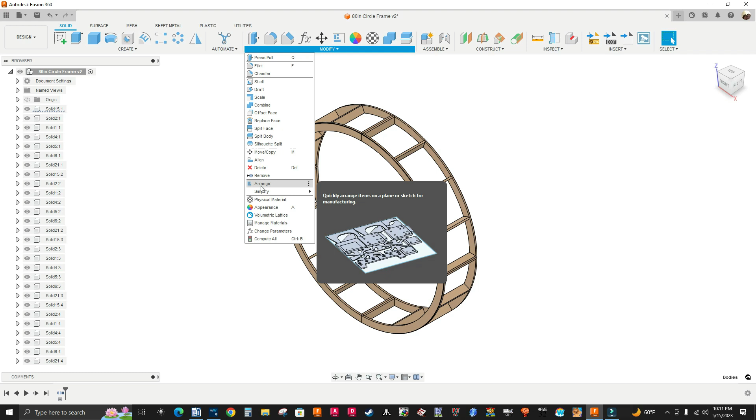With the nesting fabrication extension, it does everything for you automatically. If I go to Extensions, I'll show you which one it is—you see it's Nesting and Fabrication, and mine is active. It's going to be active for 14 days, so this is great.

So if you do a lot of nesting, have a nested base CNC machine, Homag or Weeke, and do a lot of nesting, and if you have the money to afford this extension, which is $1,600 a year—sometimes they have promotions so you might get it cheaper, maybe 1,500 or 1,400—you could also pay monthly, which is $200 a month. That's a lot of money.

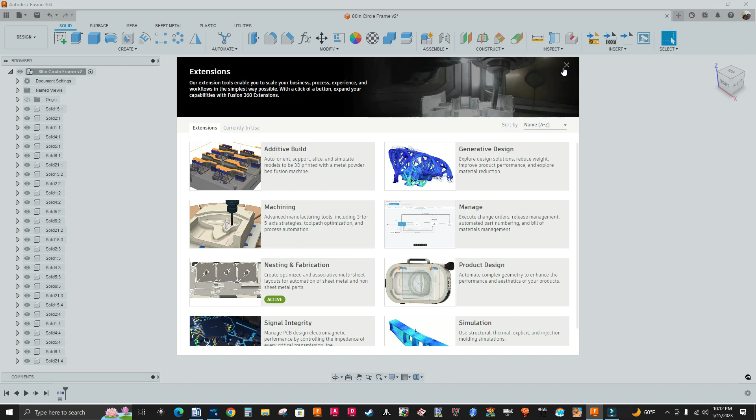So it's a pay version, keep that in mind. Let me click on the X and go to the Manufacture workspace. Let me show you what I did. You see I have one sheet, with the parts laying flat.

The first thing I did is I went to Fabrication. Before I create a nest study, I went to Process Material Library, and by default the material is set to metal, so I changed that to wood. You see the thickness of the material, which is 3/4 inch plywood, a little under 3/4.

Under Packaging, this is where you define the size of the sheet, so I have 97 by 49 inches. Right here you can type the cost of the material and put a comment. I didn't do this here, so I don't want this video to be too long—I'm still learning this nesting and fabrication extension.

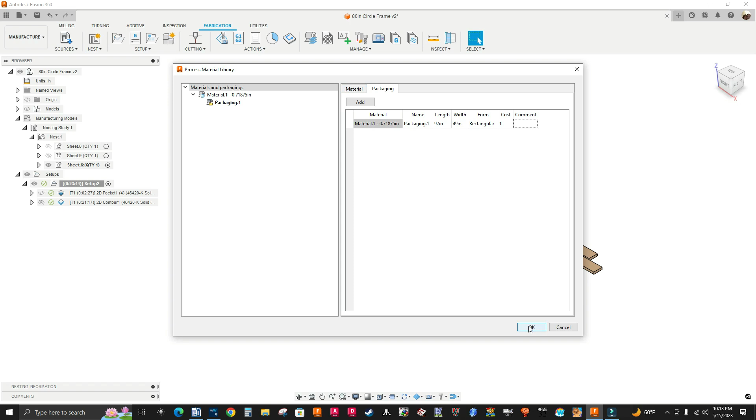I'm going to click OK, and then I went to Create Nest Study, and it gave me a manufacturing model. There's a nesting study right here, so if I right click and Edit Nest Study, you've got all the parts here.

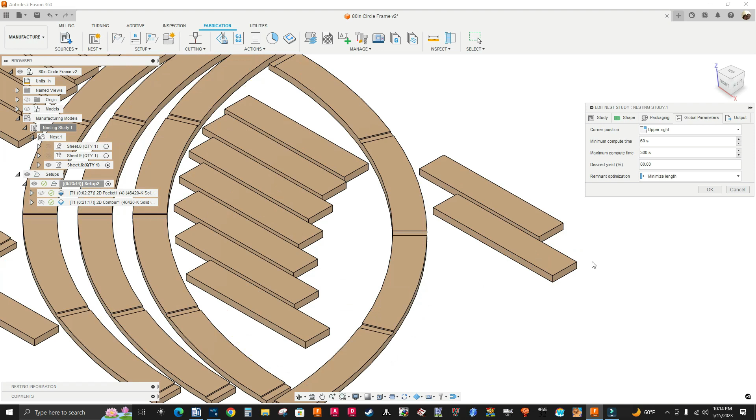It gives you the size of the parts and the thickness and stuff like that, and the packaging—right here you have the length and width of the sheet. If you want to change it, you cannot change it here. Under Global Parameters, my corner position is upper right, so my origin is going to be right here.

These are just stock settings and stock values. Under Output, I have Create Manufacturing Model checked. You can show part outlines if you want, and include stock—I have those two unchecked. So let me click OK.

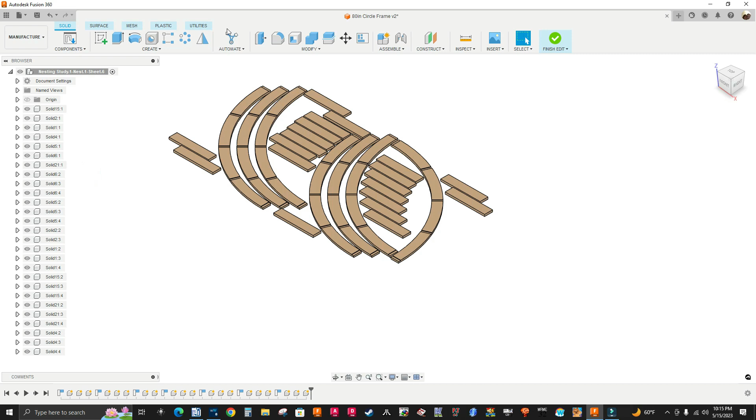If I select Sheet 6, right click, Edit Manufacturing Model, right here you can make changes to the parts. You can put a hole, or let's say put a groove here if you want one of these panels, and you could just click on Finish Edit.

If I select Nest, right click Edit Nest, I'm going to skip down to the last tab, which is Global Parameters. This is where you type a value for frame width and item separation—this is the spacing between the parts. I have 0.38 inches, since I'm using a 3/8 downcut end mill.

These settings right here are unchecked. If you want to make changes to the spacing and frame width, we have to check this box, and you can make changes here if you want. So under Packaging, see Shapes—you have all the parts right here.

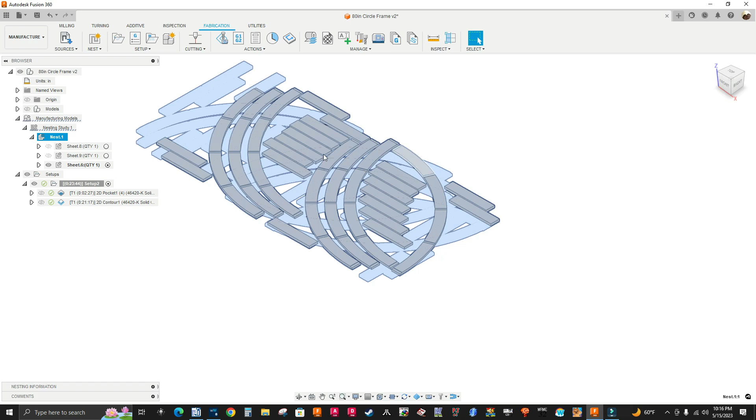Okay, nest stack size, I have one. Automatically calculate nest is checked. That's that. So I'm gonna click OK, and after that, just I select setup, and then I'm gonna show you what I did. So right click edit.

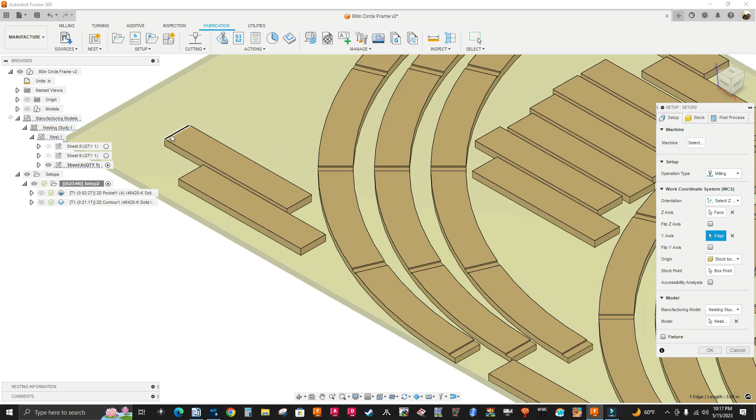So on the setup, my orientation is set to select z-axis and y-axis, and my z-axis is this face right here, this part, and then my y-axis is this edge right here, and my box point is this point right here.

And under model, you don't have to select any part; it automatically selects the nesting model for you. So that's great. See, manufacturing model says nesting study. So on this stock, see, it automatically gives you the size of your sheet, and the mode is gonna be fixed size box. So it's gonna select that for you, and you see you have the size of the stock right here, 97 by 49 inches.

Model positions set to center. You see my height or the thickness is 0.71875 inches, and model position center right here.

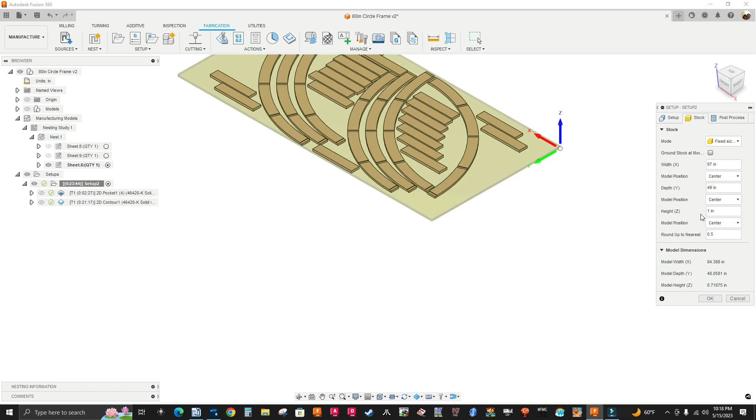By default, you're gonna have see where it says round up to nearest, you're gonna have 0.5. I work in inches, so it's gonna be 0.5 by default. It's gonna give you a Z height of 1 inch, so you gotta be careful. So if I put it on, from you you can see it, it's adding material to the top and bottom. So you make sure you have this set to 0, so it's gonna give you the right Z height or the thickness.

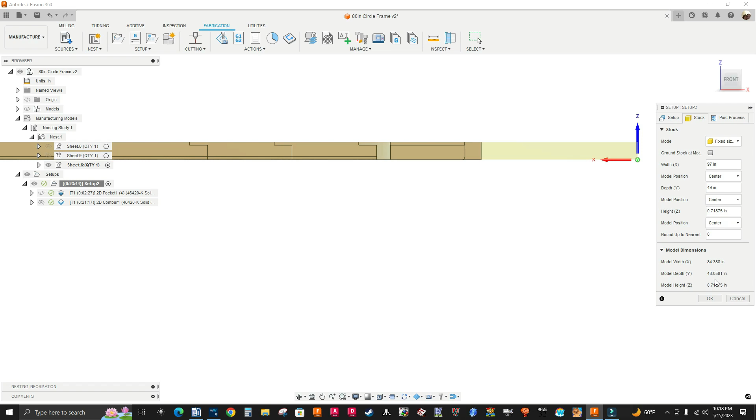And under model dimensions, so I have the model width, got 84.388 inches, and wide, I have 48.0581 inches.

And post process, I have the program name, 80 inch underscore frame, and then program comment, I had 3/4 inch plywood sheet. So let's say I'm programming, I'm doing the program in the office, so I just tell the operator to read the comment. It lets the operator know what material we're using, so in this case, it's 3/4 inch plywood. So I'm gonna click OK.

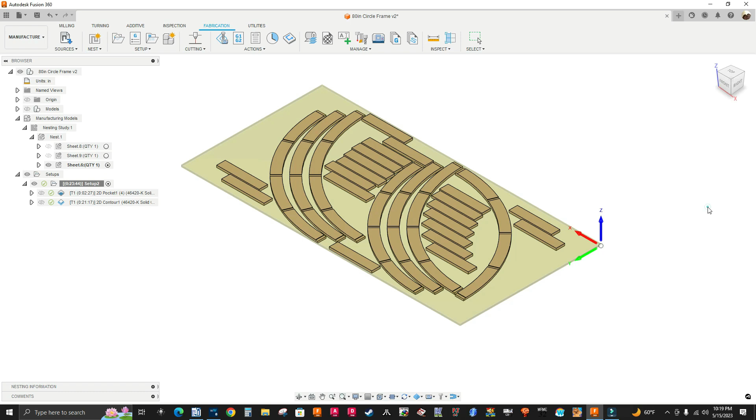That's the setup. And then next, I use a 2D pocket, for the grooves. So I'm gonna right click edit, let me show you.

So see, I have a 9 millimeter, it says 3/8, but it's actually 9 millimeters. So see, I have the feeds and speeds. Everything's in inches, but let me change this to millimeters so you can see it, you can see everything in metric. So units, I want to change from inches to millimeter. We click OK. Let's go back to that 2D pocket.

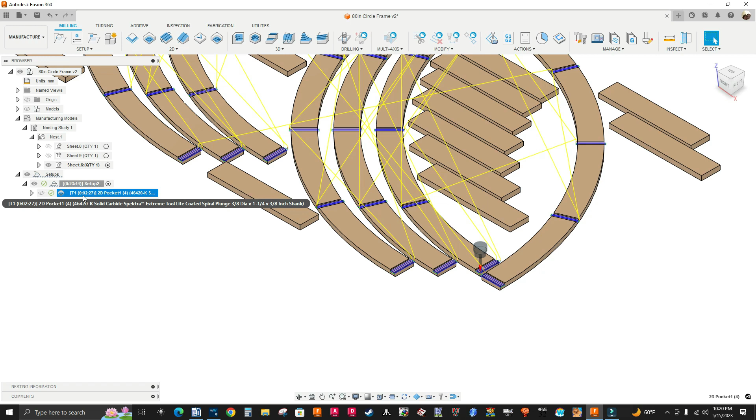Right click, edit. So you have the feeds and speeds, see, 10 meters per minute, 18,000 RPM, the lead-in feed rate, lead-out feed rate, 3 meters per minute. Okay, and you see everything else here.

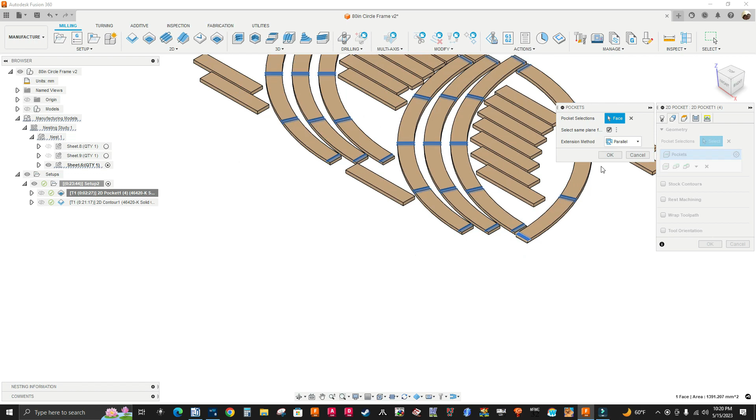And so under geometry, I'm gonna click on this gear icon to edit. So I just selected one face, this face right here, and then checked on this box where it says select same plane faces, and then select the rest of the pockets. And I have extension method set to parallel. And I'm gonna click OK.

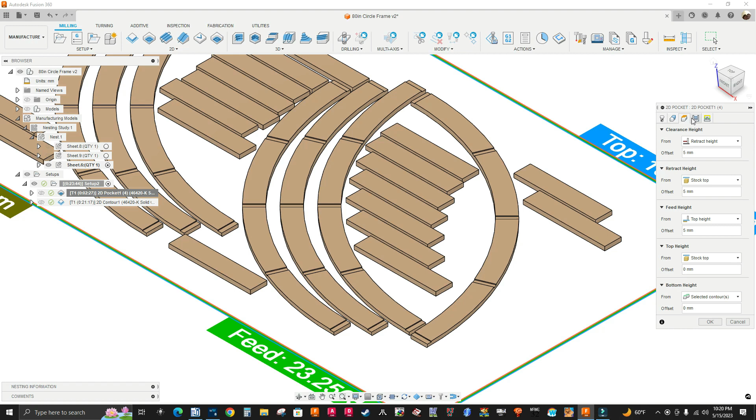Height tab didn't do anything here, so I'm gonna skip it. Actually, I'm gonna go to the next tab, and under passes, this is what I use for that old machine at work, this is my tolerance, the one that works best for that machine. And let me go to linking tab, I have ramp type plunge. Okay, let me click OK.

That's a 2D pocket, and then I use a 2D contour, same mill. So I'm gonna right click.

So I'm gonna go to height tab, and under bottom height, see right here, I'm leaving an onion skin, so I'm leaving 0.254 millimeters, that's 10 thousandths of an inch. So this is in millimeters.

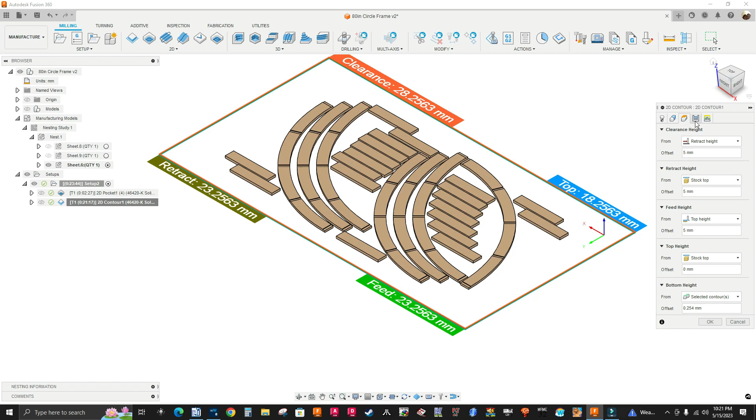Right here under passes, you see I have multiple depths checked, and my maximum roughing step down is 5.4 millimeters. I have an expression here, so I have tool diameter times 60% of the tool diameter. Same thing with finishing step down. And I have order by depth checked. If I uncheck this and use order by islands instead, it's gonna have more retractions. So I have order by depth checked.

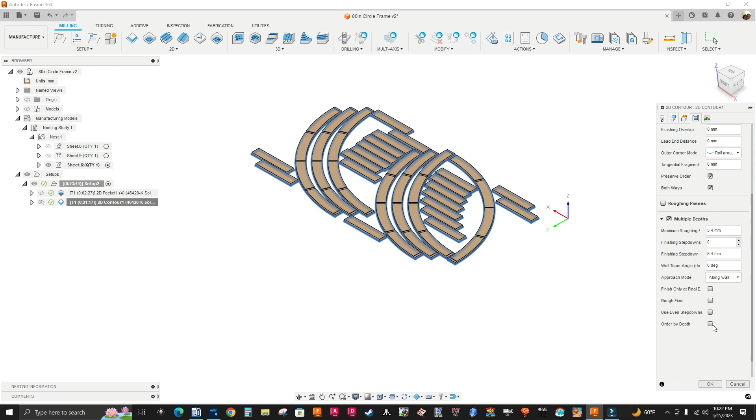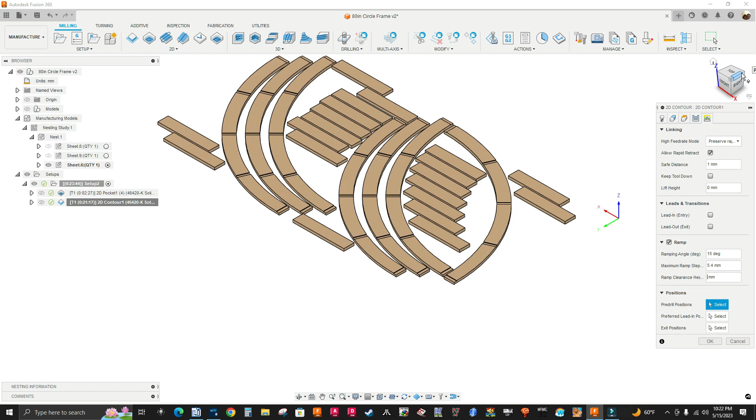And under linking tab, I have a ramp, and my ramping angle is 15 degrees. My ramp clearance height is 0. If I have, let's say, 1 millimeter, you'll see what's gonna happen. Before that, let me put this back to 0. Okay, back to 0, I'm gonna click OK, and I'm gonna simulate this tool path.

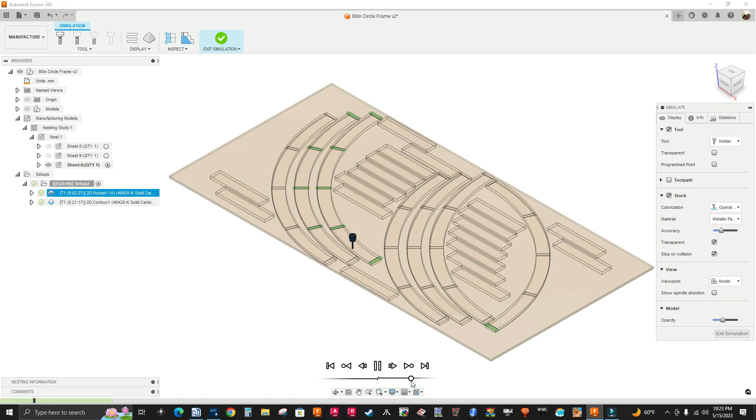Right click, simulate. I have transparent checked, so I'm gonna play it. See, it's doing the 2D pockets. And it's doing the 2D contour. See, it has order by depth, so it's gonna go down 5.4 millimeters, that's the first step down. But let me stop it.

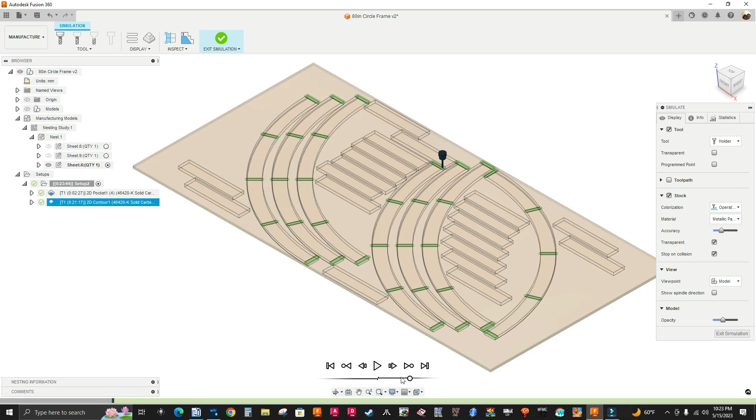Let me go to that 2D contour. I'm gonna go to my timeline where it starts right here. I'm gonna slow it down a bit, I'm gonna play it. It's gonna do a 2D contour right here. See, it has that 15-degree ramp right there. So let me speed it up.

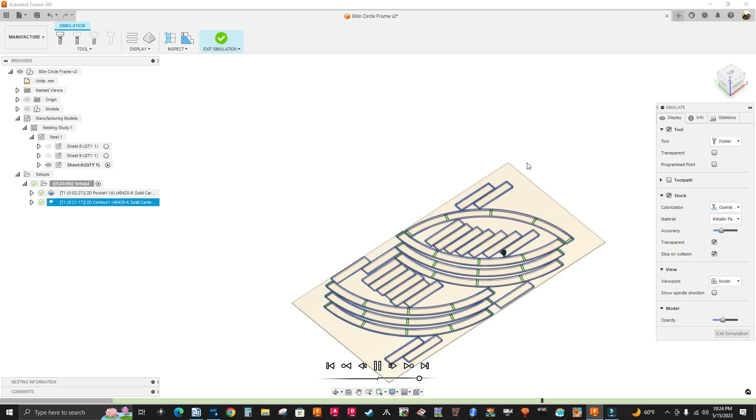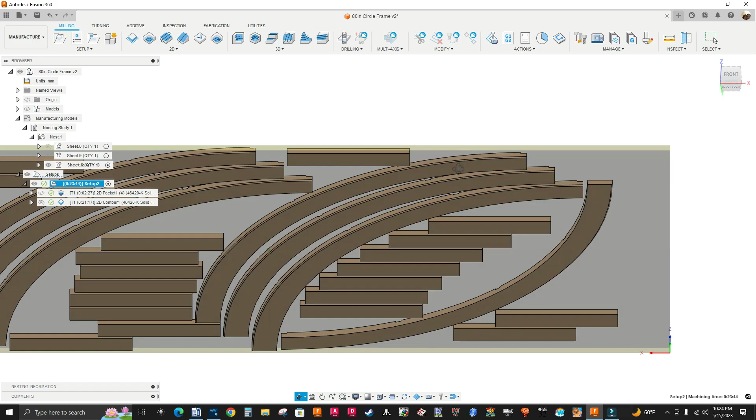Okay, and there's a toolpath. That's great. Let me show you something you might encounter when programming parts like this. Let me show you the bottom. Some of these parts have like a small fillet.

See the edges are round, so like a small fillet. So when you select a 2D contour, right click, edit. Let me show you under geometry. I skipped this, sorry about that. So I have silhouette selected.

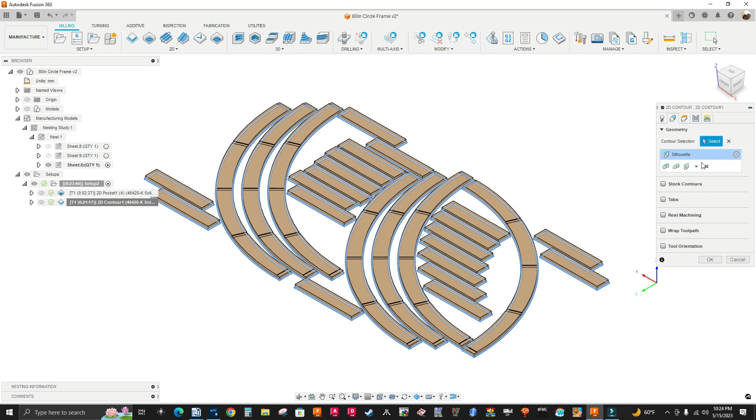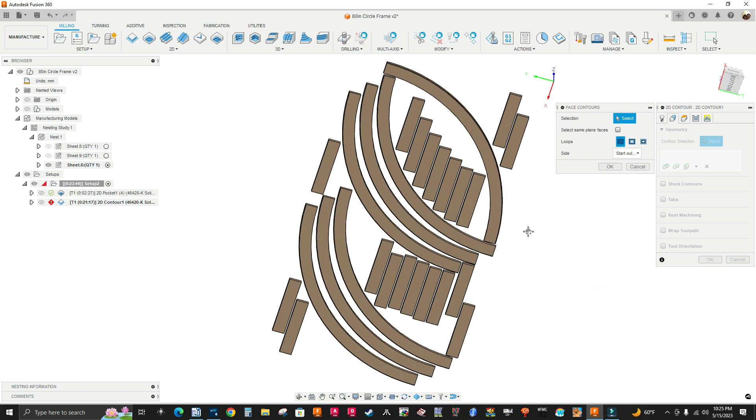Let me click on this arrow. If I select face contours, before that let me click on the X to clear everything out. So I'm gonna click on this arrow pointing down, and if I select face contours, it's asking me to select the face. So I'm gonna select this face right here, and check this box, select same plane faces.

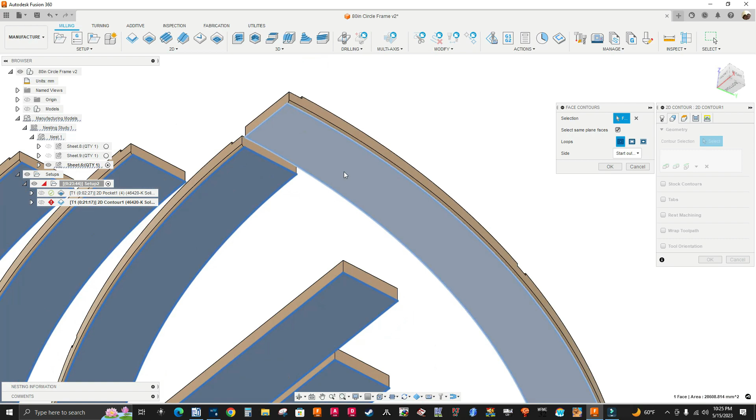Okay, that looks good. But if you zoom in, you see it's not selecting the round edges of these long parts. See that? So I'm gonna click OK. I'm gonna click OK again.

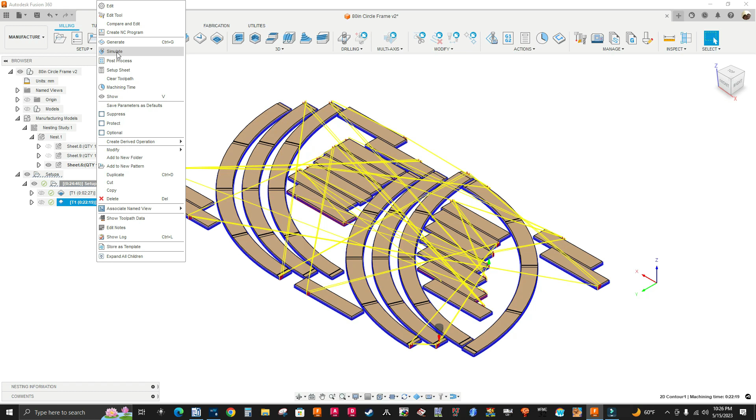And let me play these. Let me play this 2D contour. I'm gonna right click, actually simulate. So let's simulate that 2D contour. I'm gonna play it.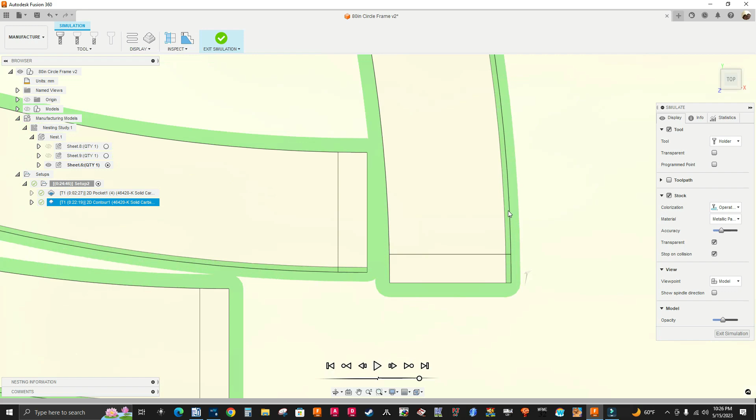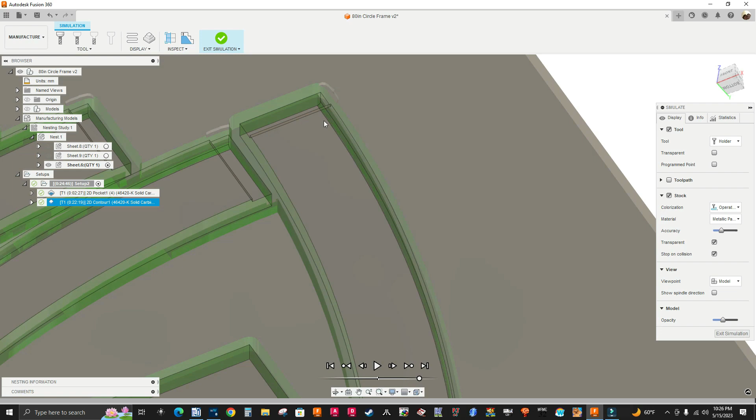Let me put it on top view. And you see what it's doing? It's machining right here into the part. So these long parts are gonna be a lot smaller. See that? Because it's only recognizing the flat faces, these flat faces right here. It's not recognizing the round edges of these long parts. So you have to be careful with your selection.

Okay, so let me escape. I'm gonna right click, edit. I'm gonna go back to silhouette, geometry. I'm gonna click on the X, click on this arrow, or I can just select silhouette right here. Select bodies or faces. I'm gonna check select model, select setup model.

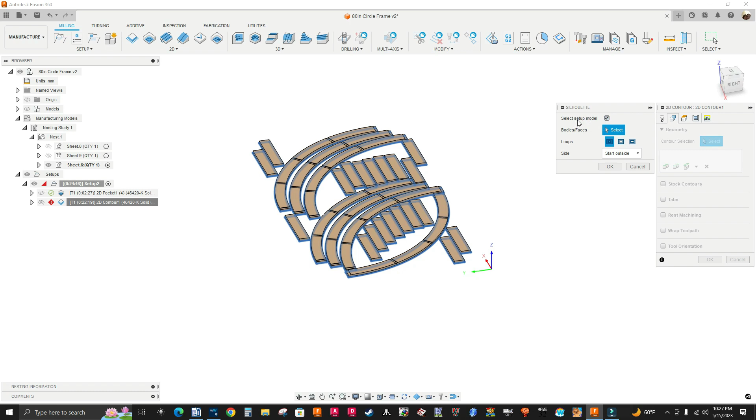And I'm gonna select this face right here. Oops, what did I do wrong? Let me cancel. Select silhouette. Okay, so this has got to be checked. Sorry about that. So now it recognizes.

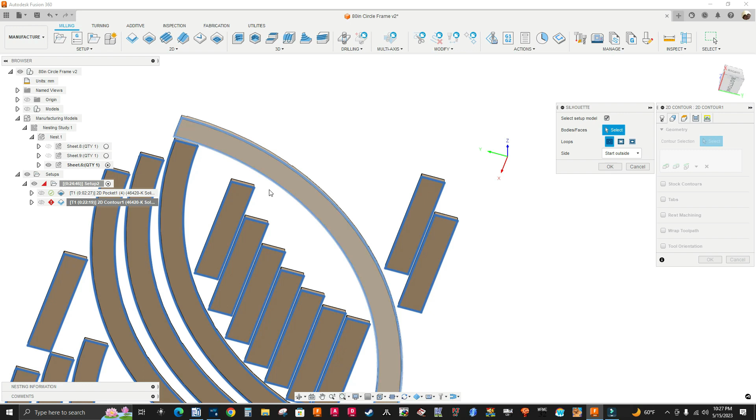See, the selection recognizes the round edges of the long parts. See that? And under loops, I have all loops selected. I can select outer loops if I want, or inner loops. See, I don't have any inner loops, so I'll stay with the first one.

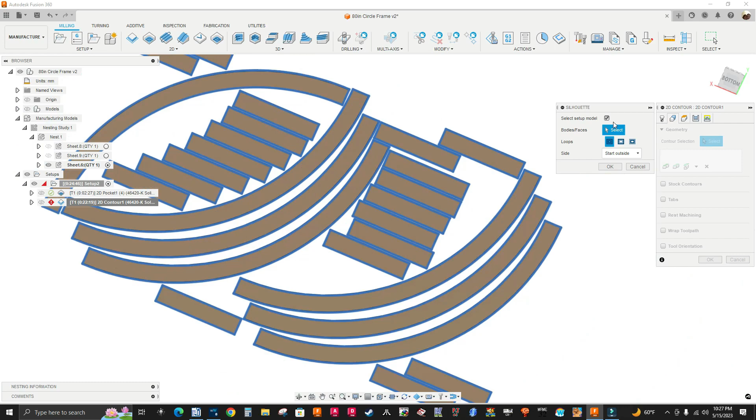So we have something like this. If you have parts like this that don't have 100% flat faces, you have to select silhouette. So let me click OK, and let me click OK again.

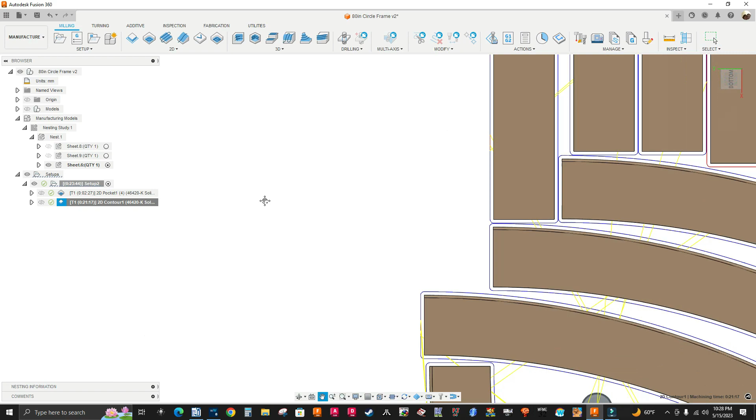Let me zoom in. Click on bottom view. Okay, and this is what I want.

Okay, and I have this program posted already. So let me go to woodWOP 5.0 and show you this program. Okay, and there it is.

So you have the size of my part in X and Y. And I have, see where it says SL, that's the stock length. That's the size of the sheet in X. And then stock width is the size of the sheet in Y. So it's gonna be 97 by 49 inches.

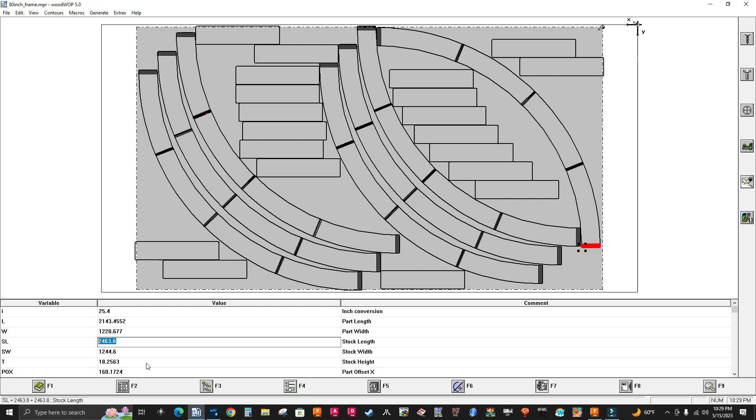So I can check myself if I want. I'm gonna highlight this, hit Control C to copy, get my calculator, type Control V. This is a millimeter, so I want the value in inches, so I'm gonna divide it by 25.4. That's 97, that's great.

So I'm gonna select the stock width, Control C to copy, go to my calculator, escape, Control V to paste, divided by 25.4, and that's 49 inches. Okay, so that's how I check myself when doing jobs like this.

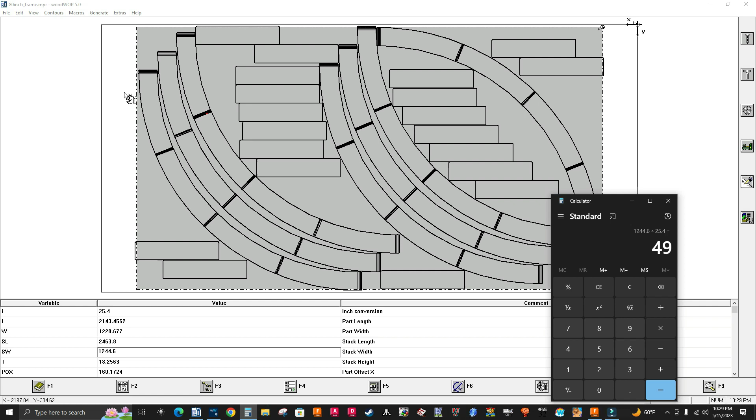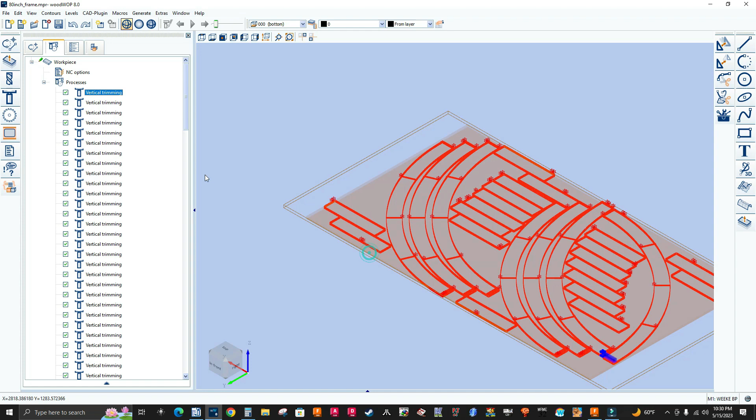Okay, let me go to WoodWOP 8.0. I have it right here, and there's a program, WOP 8.0. Okay, and put it in an isometric view. So reset view, see that? Let me close this and this right here. Okay, and there's a program WOP 8.0.

Okay, all right guys, so that's all I wanted to show you. That's it for this video. I hope you guys found this video helpful.